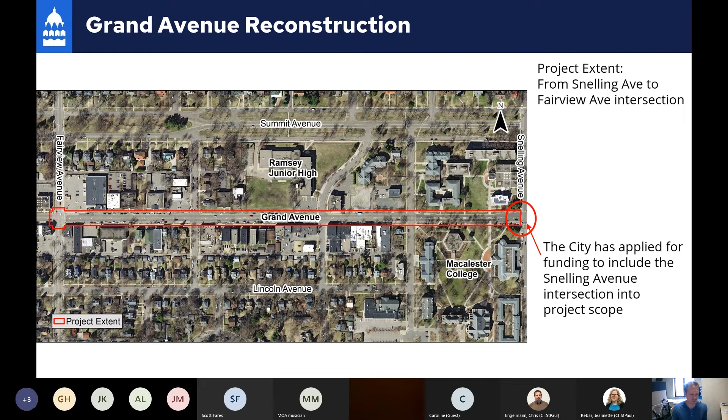First, I want to talk a little bit about the project need and goals. The project need is really four main needs. The first need is low pavement quality present throughout the project extent. If you've driven, walked, or been around this part of Grand Avenue, you remember that the area through Macalester College was particularly bad, and it had a thin resurfacing project done a couple years ago, but we're now coming through to do a full reconstruction. Low pavement quality is pretty evident throughout the entire project extent.

Another project need through this area is very high pedestrian activity. We've got Macalester College, Ramsey Junior High, and plenty of high traffic businesses, restaurants, hardware stores, and paint stores that have a lot of pedestrian activity going in and out of the corridor pretty much all day and in the evening. There are some pedestrian crossing needs at intersections, and notably those mid-block crossings within the Macalester College campus. We'll talk about that a little bit later.

Finally, there's quite a bit of aging underground utilities and other infrastructure below the surface of the street that really hasn't been touched in a long time, and it's really time to get these utilities updated and replaced. This project presents a great opportunity to do so.

So some project goals we've put together for this project are to improve safety along the corridor, with an emphasis on pedestrian crossing safety, specifically through Macalester and by Ramsey Middle School. Upgrade and modernize aging infrastructure. Improve the built environment to better serve Grand Avenue businesses. Improve the transit user experience through here - we've got the Route 63 high frequency route that runs down Grand Avenue. Looking to balance mode share to encourage non-automotive trips along and to the corridor.

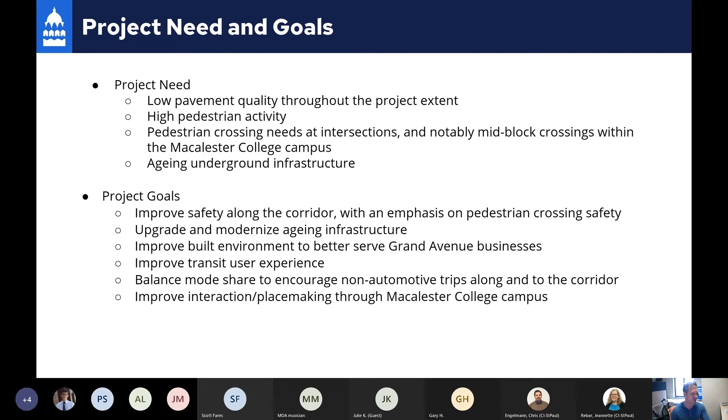Another project goal that's important to note is to really improve the interaction and placemaking through Macalester College's campus. One thing from frequent discussions with Macalester College is that the right-of-way of Grand Avenue initially was built for a streetcar - only the streetcar - and vehicles and trucks were added later, after the campus was already built out. So one of the things we want to look at too is potentially improving that interaction and placemaking in the campus itself.

A little bit of the corridor history here. Grand Avenue's original use was for a streetcar line that ran all the way down Grand Avenue, through this section of the corridor and through Macalester's campus, as they donated that right of way.

Once that streetcar line was established, businesses and residents started moving into the area. This image from about the 1920s shows development on Macalester College's campus with homes to the north, and businesses coming up along Grand Avenue, right in the middle of the picture.

The streetcar lines were all discontinued in the 1950s, and Grand Avenue was converted to a general traffic roadway, including that bus route and other features. Through the years, Grand Avenue through Macalester's campus has evolved from an original streetcar route to a general traffic street, to what we see today with that constructed, landscaped median running through campus to give it more of a campus feel, different from the rest of Grand Avenue.

Some recent work: a thin mill and overlay was done in 2020 through Macalester's campus from Snelling Avenue to Macalester Street. Additionally, the center median we know today through campus was installed in the mid to late 2000s, paid for by Macalester and installed by the city's Public Works Department.

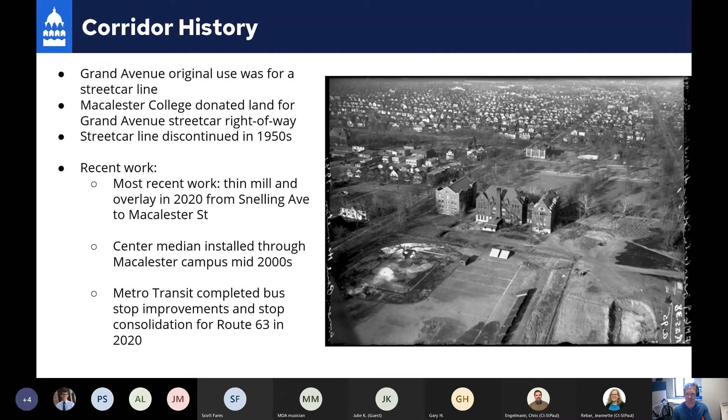Some early project data, just a general idea here: the project construction year will be 2024. The project is a full depth reconstruction, meaning we will take everything out—roadway, sidewalks, everything—and put it back in through this process. That includes roadway surface, curb and gutters, street lighting replacement, reconstruction of sidewalks and boulevards, underground utility replacement, and right now also signal replacement at Fairview Avenue.

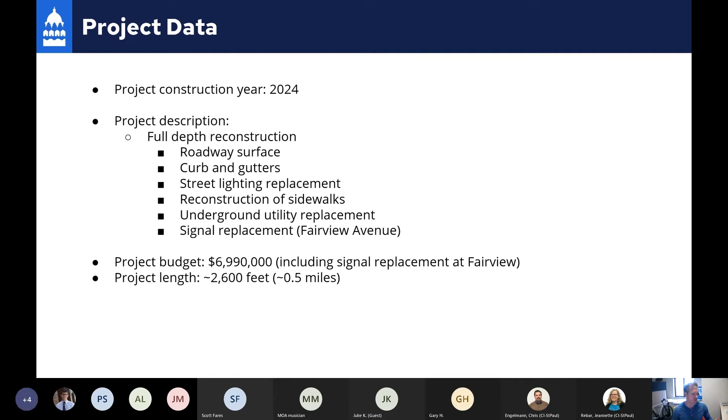Those signals are getting pretty aged. Project budget is just under $7 million, 6.99 million, which again includes that signal replacement at Fairview. The project length is about 2,600 feet, or about half a mile, 4 city blocks from Snelling to Fairview.

Existing conditions overview—we've mentioned some of these, but we'll go through them again. Grand Avenue is considered a main street in our city. It's technically classified as a minor arterial with the state and federal government. Those have some connections and requirements we'll need to consider as we do our redesign, but for most purposes that's not the most important information, though it is something to note.

Route 63 is a high frequency bus route that runs down Grand Avenue, including those 3 stops eastbound and westbound at Fairview, Cambridge, and Snelling Avenue. Additionally, the A Line stops are located along the southern leg of Grand Avenue and the Snelling Avenue intersection on Snelling Avenue—that's the arterial bus rapid transit route that runs up Snelling Avenue from 46th Street Station in Minneapolis to Rosedale Mall.

Pavement condition, as noted earlier, is pretty much poor throughout the project extent, anywhere from 13 to 51, and those numbers are out of 100.

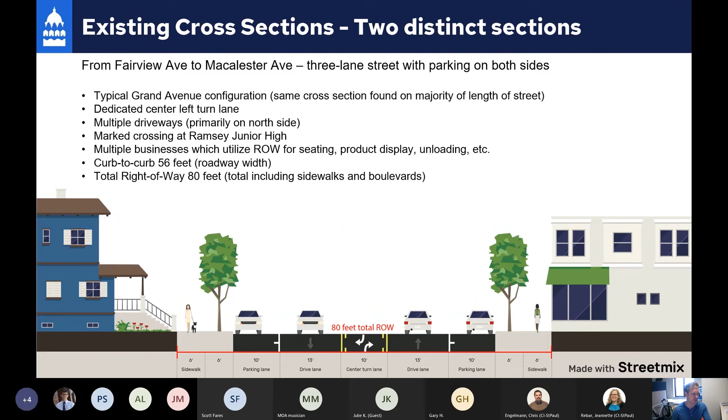The curb to curb width, from where cars park to where cars park on either side, is about 56 feet for the roadway width. The total right of way, including roadway, sidewalks and boulevard, is about 80 feet. That's pretty typical throughout the entirety of Grand Avenue, and as we look to redesign this part of Grand Avenue, it could potentially impact other parts of Grand Avenue if what happens here is successful.

The other very distinct section is through Macalester College's campus, from Macalester Street to Snelling Avenue. This is just a 2-lane street with left turning facilities at intersections, but with a pretty nice landscaped center median. This is an atypical configuration for Grand Avenue, very specific to Macalester College since it cuts directly through campus. Residence halls are to the north where students live, and to the south you've got lecture halls, administration, athletic facilities and other things. So you have pretty frequent pedestrian traffic going from north to south across Grand Avenue here.

This includes that landscaped median, as mentioned earlier, installed by Public Works at the college's request. There are 3 mid-block crossings through the section that were put together when the median was installed - we'll talk more about those particular crossings. Otherwise, you have a 14-foot drive lane through the section, really the most narrow we can make drive lanes when there are no coordinating parking lanes or bike lanes. Special vehicles like fire trucks and ambulances need that 14 feet of space to get through the city.

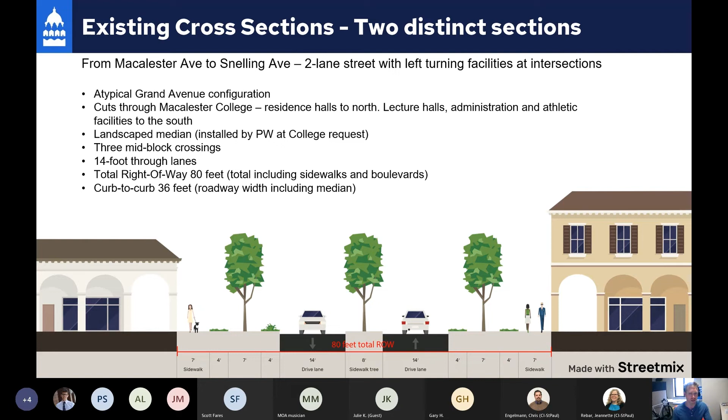Total right of way here is the same as other parts of Grand Avenue, 80 feet. However, the curb to curb width, including that median, is just 36 feet through the section, considerably shorter than other parts of Grand Avenue for people crossing the street.

Before we talk about those cross sections in more depth, I want to talk about what engagement activities have taken place so far. Public Works staff has really been extensively engaging stakeholders since March of this year. Over the last couple of months, we've been going out to the community and having early conversations before tonight's open house. We've also been working closely with MnDOT since they have a close adjacent project on Snelling that they have planned - we'll talk about that in a bit.

Discussions have been held with MnDOT and will continue throughout this year and next as construction approaches. We've also been working very closely with Macalester College and their High Winds Fund, which is their philanthropic arm, as well as their neighborhood organization arm. We've had multiple meetings with Macalester staff and will continue to coordinate with them throughout this process.

Additionally, we held a pop-up event on campus on April 27th before students left for the school year, and were able to talk to a lot of students about how they think about Grand Avenue and how they use the street today. Staff also went to a Macalester staff neighborhood update held internally on May 25th to give a little overview of this project.

Over at Ramsey Junior High, multiple meetings have been held with school staff, with continuing coordination throughout this project. Public Works staff held an on-site observation on May 11th to observe how pickup and drop-off worked at Ramsey School during those hectic times when parents are dropping off and picking up their kids, and kids are coming to school - we observed that for a morning and an afternoon.

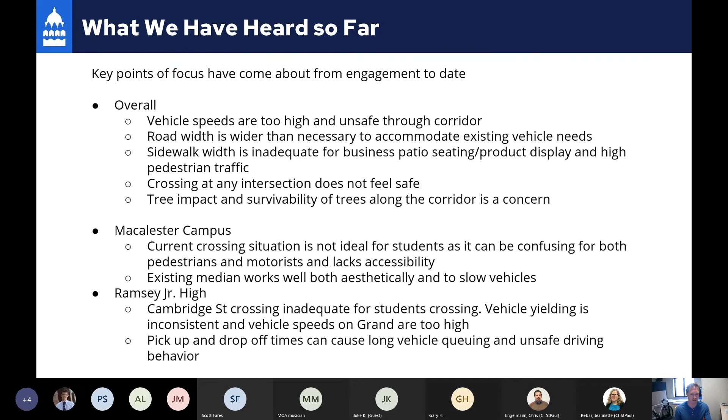That leads us into some key design questions as we move forward through the year. First, we're talking specifically about pedestrian crossings here. So first, I'm going to talk about that Cambridge crossing since we just mentioned that.

That crossing is adjacent to Ramsey Middle School. It is marked and signed. There are painted areas that would potentially be considered bump outs - the idea that you extend the curb area on the intersections to allow pedestrians shorter crossing distances. There was a study in 2013 done by Public Works with the school, which recommended curb bump outs, but at the time funding wasn't available, so the compromise was to paint and put some plastic bollards - little plastic things you see in the street that delineate areas cars shouldn't be. As you can see from this image, those bollards didn't last very long, and the funding wasn't there to keep putting them up, so now it's just a similar intersection you'd see anywhere with some paint and signs on it.

Additional note for Cambridge Street is it's also identified as a bicycle boulevard in our bicycle plan, and that is something we will also be considering as we look at alternatives in the future for this intersection. But safety is definitely something we will be looking at for that Cambridge Street crossing intersection specifically.

The other crossings we're looking at in more depth are the Macalester campus mid-block crossings. There are some issues with the Americans with Disabilities Act, specifically on these mid-block crossings, where you don't have any ramps that would allow someone in a wheelchair or otherwise mobility impaired to cross the street in these mid-block areas. In fact, there are signs that say if you're in a wheelchair, you should go to one of the two intersections if you want to cross Grand Avenue.

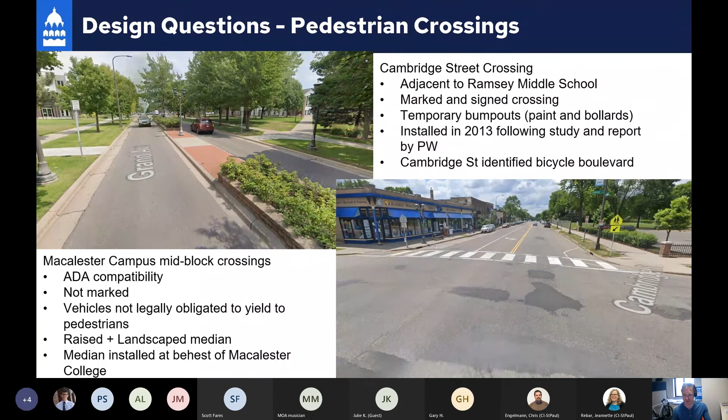Other design questions we'll be considering as we move forward: on the right here, the Grand Avenue sidewalk width - as you can see in this image by French Meadow, it can get pretty narrow. I was out here last week and took this picture. It can get pretty narrow when you have seating areas, product display, planters for nice plant displays and things like that, and you need room for pedestrians to walk.

As you can see here, it's a very tight fit - and this is with no one sitting in these chairs. If these chairs are out, you can imagine it's an even tighter fit for pedestrians. That's something I think we'll be looking to address as we move into redesigning this area, to potentially provide a little more breathing room for both pedestrians and other uses on the sidewalk, especially in some of these busy business-dominated areas.

These tight areas really also reduce pedestrian comfort along the roadway. The closer you are to moving vehicles, especially if they're moving faster, the less comfortable it feels to be a pedestrian in an area.

Additionally, the narrow boulevard - about 6 feet throughout Grand Avenue - is not optimum for tree health. Six feet is kind of our minimum to provide for tree planting, but we hope in some cases to provide up to 8 feet, as our forestry department has mentioned, to make sure the trees in our boulevards stay as healthy as they can and live their full lives. That's something that's going to be considered as we move forward.

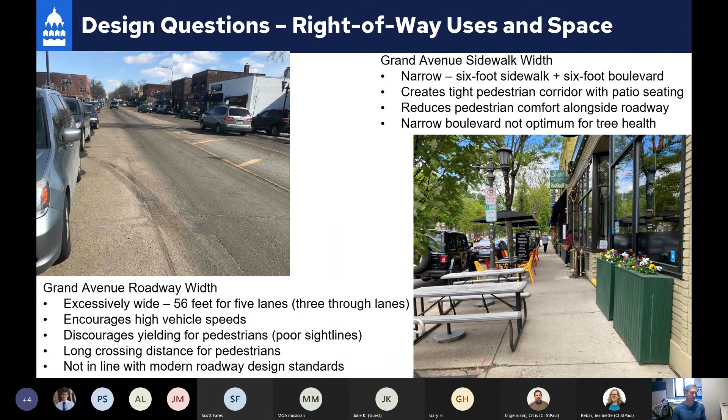Also, the way Grand Avenue is designed today is really not in line with modern roadway design standards. We really like to use all the space we have on these roadways, narrow lanes, and discourage high speeds from vehicles, especially through mixed use corridors like Grand Avenue.

Now I want to talk about the project timeline. Right now we're still in phase 1 of engagement, running from the beginning of this year through June. This includes gathering general opinions and experiences on current conditions on Grand Avenue - soliciting how you feel about the street today, what works, what doesn't work, and what you'd like to see in the future. These are the more basic questions for the corridor.

January to April included a lot of the stakeholder conversations I outlined earlier. In April we opened the survey and online engagement tool - some of you have probably already interacted with those. We've gotten about 400 survey responses and another 100 or so responses from our interactive map. So we've got tons of engagement already and tons of great information from everyone - that's really good to see.

In May we also had in-person events - Macalester Campus, Grand Ave businesses. In June, open house number 1 on June 1st - we're actually in June now. By the end of this month we will finish phase 1 engagement, closing the surveys and interactive maps. We'll then take all the data we've gotten from tonight, the surveys, and the maps, aggregate and summarize it, and publish a summary document outlining what we've heard throughout this process and what that can mean for redesign as we move forward.

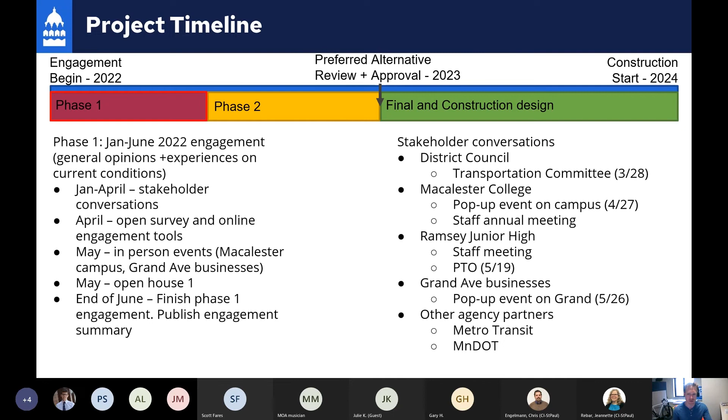Moving on to phase 2, tentatively planned from July to November engagement. This phase will see staff producing alternatives for redesign of the street, which will be vetted internally from July to August to make sure everything works with the different requirements we have with state and federal government.

Then we'll move on in September, where we'll publish probably 3, 4, or 5 different alternatives for what Grand Avenue could look like. They could include wider sidewalks, medians throughout the intersection, or curb extensions at intersections. There are a lot of different potential possibilities here, so I don't want to limit that at all.

Once September rolls around, we'll go out to district council again and talk with them about these potential alternatives to get their feedback on what they like and don't like. We'll also hold another open house similar to this one, presenting the alternatives and soliciting your feedback on what works and what doesn't.

Following that, the preferred alternative will be formulated from all the public feedback and our internal discussions. We'll move to have City Council review that final design and sign off on the concept design by the end of this year or early next year.

Final design will take place in 2023, with city staff creating construction designs—Chris will be handling that. That moves us to where the project will begin construction in season 2024, with the plan to have it all wrapped up within one construction season to limit impacts.

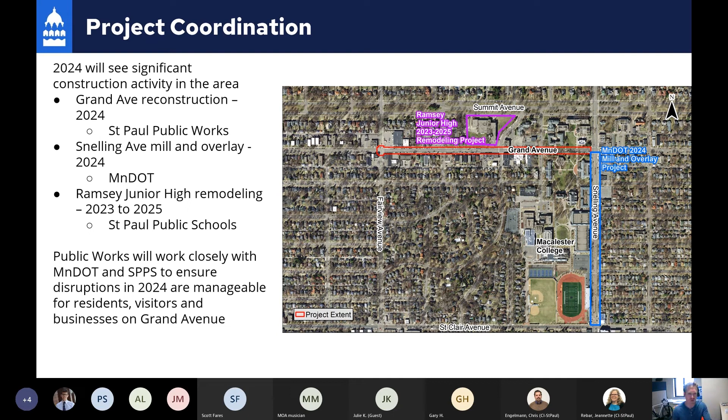So with all that said, it's a lot of information—thank you for hearing me drone on for a bit. I just want to outline some known issues and concerns along this segment of Grand Avenue, and then I'll open it up to questions and comments from anyone about this project.

Some of these known issues: pedestrian crossing facilities and general roadway safety is a big issue, with an emphasis on pedestrian safety. Another one is business loading and right-of-way use through the area—what businesses need through the right-of-way, whether that's pedestrian improvements or street improvements.

Ramsey Middle School's circulation patterns, Route 63 bus accommodation - those are kind of some of the big ones I think we're looking at through this area. But with that said, I'd like to open it up to anyone if there's any additional concerns we should be evaluating or addressing, any additional opportunities which maybe we have missed or aren't seeing that we should be exploring on Grand Avenue, any expectations or needs, or any other questions or comments.

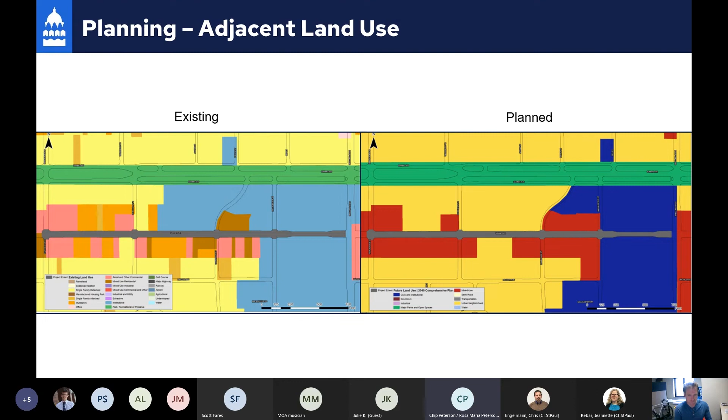Thanks, Chris. I'm also Rosa Maria de la Cueva Peterson, and I wonder, have you considered having a parking lot like in Edina, near the Edina theaters when they existed? A parking ramp, so that we live on Lincoln Avenue and it's very hard to find parking. You have a lot of overflow from that. We have a lot of overflow from the businesses, and we love to have the businesses nearby. But I wonder whether a parking ramp is considered in this plan.

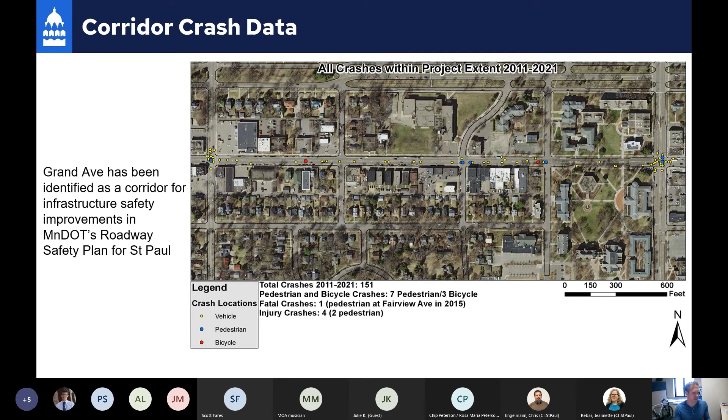Good question, thank you for the question. From Public Works point of view, we are kind of stuck with the right of way. So we have that, where the street is today, that's kind of what we're looking at in this project. The city doesn't actually own any land through this specific area, and so we as a city would have no opportunity to consider adding off-street parking availability. However, there's Macalester, which has their lot for Patagonia and French Meadow up on the corner of Macalester Street and Grand Avenue. Ramsey Junior High has their small little parking lot there at the corner as well. So that is something that, as for this project and Public Works, we don't really have control over.

But there are other institutions in the area that do have some of these off-street areas, and I think if there's specific parking issues, I think that's true, and it's tough. But I will say through this project, we aren't envisioning to lose much or any parking space on Grand Avenue, so I guess I could say we're not planning on making it worse in the future. But again, that always is up to land use, if there's more businesses coming in, there might be more people driving in. But the idea through this project and through St. Paul's kind of whole ideas is to hopefully, as we reconstruct and redesign these streets, encourage more people to not drive to these destinations. Maybe they can walk, bike, take transit, other ways to get there. Hopefully that will lessen your burden on Lincoln for parking specifically. But aside from that, through this project, there's no way we can really add parking to the area.

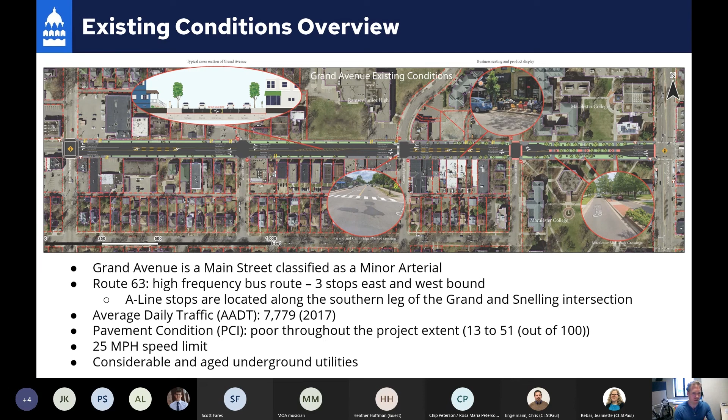I got a question again from Emily about contact information. So my contact information, I'll put it up here. It's right here, it's on our project webpage, stpaul.gov/Grand Avenue. You'll have my email address on there. These slides will also be on the webpage, they're on there right now. If you want, you can go look at these slides yourself and analyze them, and you've got my email address, my phone number on here. And again, there's no problem too small or large that I'm not willing to discuss and talk about.

I do see we've got a hand up here. I just want to say, Emma, did I answer your hand up with that comment, or is there additional? That is, I got you.

I do want to reiterate, I think what Chris said earlier is, the idea here is to get this done in 1 year. It's a pretty small stretch of roadway, about 4 blocks. So whereas the university project was obviously a multi-year large scale effort, but even still, we don't want to see any business closing.

So we will definitely do all we can to make sure that we don't see the same effects we've seen on other large scale projects within the city or in other cities. But again, this is a pretty small scale project, so we can only do everything we can. We will do all we can to limit the headaches and limit the impact, and hopefully accommodate as much as we can. Oh, Lisa, sorry, I must have missed your question.